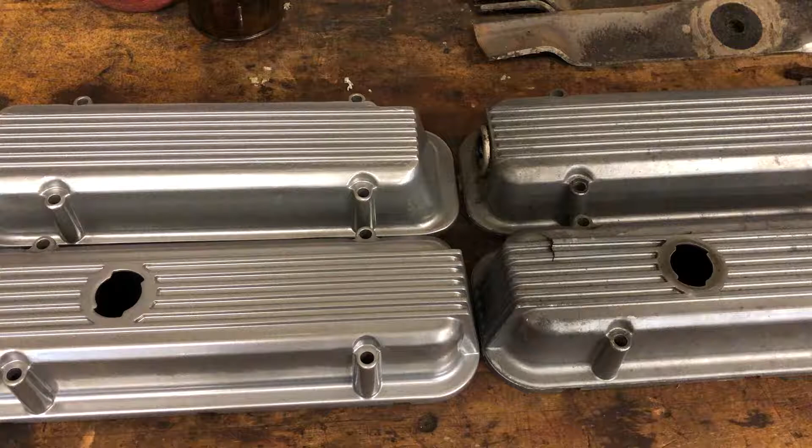Today is Sunday, December 23rd, 2018. Friday afternoon I picked up my latest set of valve covers from Final Finish in Bowling Green, Kentucky, home of the Buick GS Nationals. I say Buick GS Nationals because it's a Buick event, not Grand Nationals. It's not a turbo event, it's a Buick event, just wanted to specify that.

I got my valve cover extenders from RJC Wednesday, UPS, courtesy of Jason. Thank you, Jason. As I was telling in my previous video, this is the driver's side valve cover that got cracked, unfortunately, which is why I bought these. They were chrome, and after I got them home and started cleaning and polishing them, this side started peeling, the passenger side. So I called Final Finish, and they said bring them on, and this is the final result. I think they turned out really nice, $79.50, can't beat that. Looks a whole lot better than what I could have done with filler primer, sandpaper, and a rattle can. Plus they'll last longer.

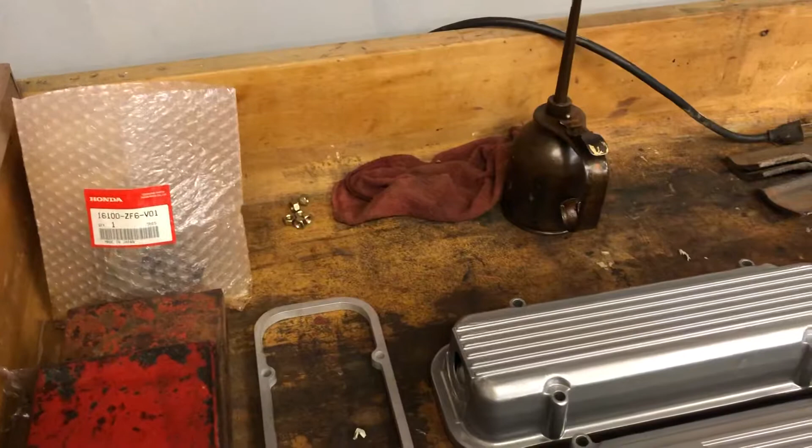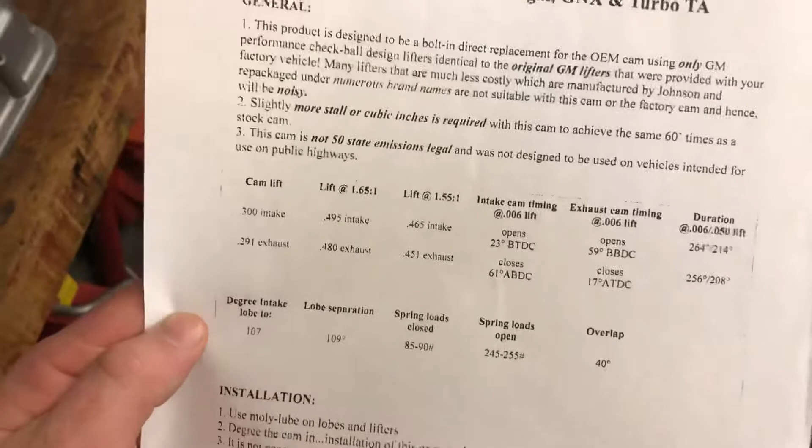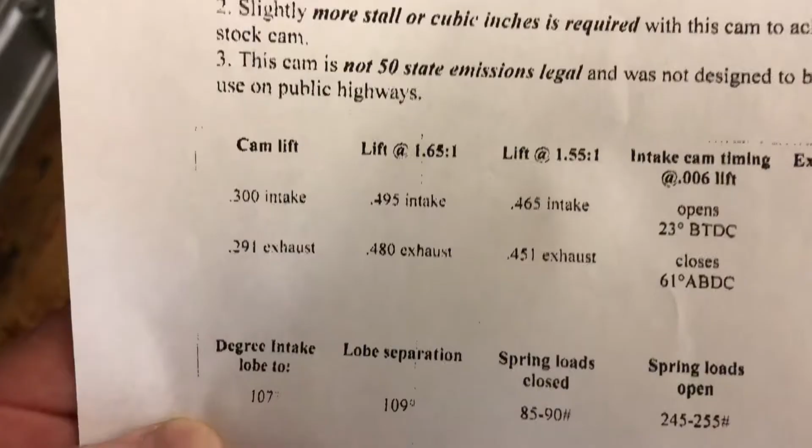I've also got my cam card here, and you know the old saying, if you don't use it, you lose it - and that in this case would be my noggin, my brain. I got my cam sheet here from ATR. Of course, they're out of business now, but they were one of the pioneers for turbo Buick, like Kenny Bell. Kenny Bell started back in the good old days with the V6 Buicks. But this is my cam card, and I have the 1.65 shaft, right here in the second column over. As you can tell, I got the 495 intake and 480 exhaust - that's my specs on my cam here. Now you know what cam is in the car. As I stated before, this motor might have 1,300 miles on it, if that.

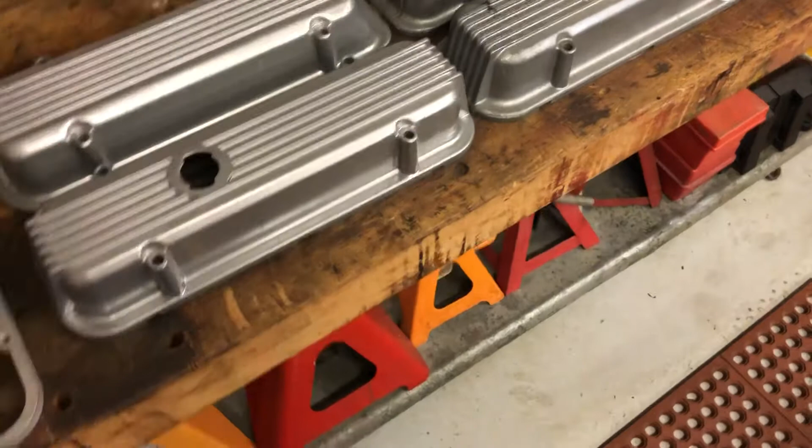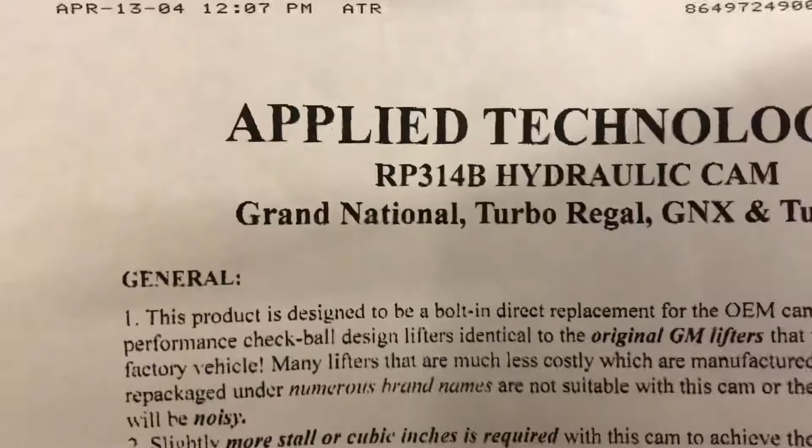This cam ATR referred to as a 214-208 cam, which in the previous video I said was a 218-218 - that goes back to the old saying, if you don't use it, you lose it. The part number is RP314B, but now you know. I've just got some papers here from when I did the motor in 2004, but as I said, it might have 1,300 miles on it, if that.

That's the old junk sitting over there, and I hope to have it back together after Christmas. It's supposed to be 70s after Christmas - of course family's coming over, it's the holiday and all, I don't want to be out here messing with the thing. But I got to get these valve cover extensions siliconed down to the head first, then slap these valve covers on, then pump out the old gas and put in some 93, and air up the tires.

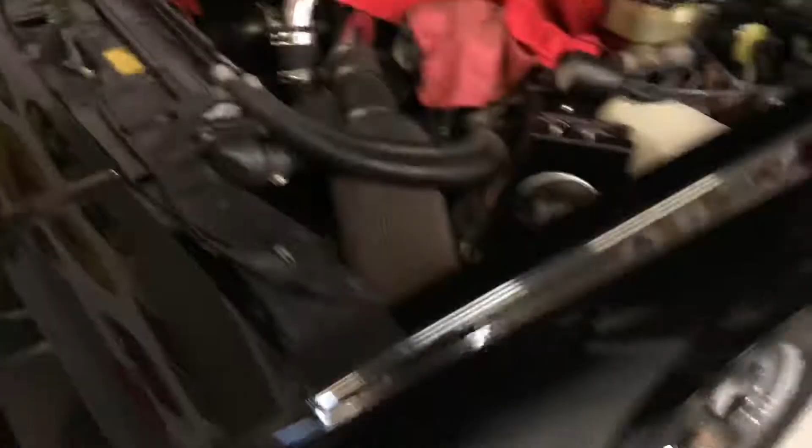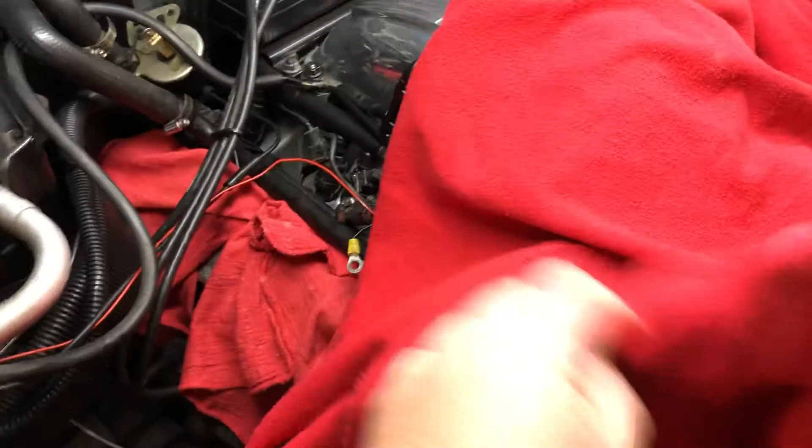Turn the light on here - I noticed something in the previous video. I don't know what caused this, I guess where this had been laying on it since April, but these plug wires faded. I can take my wet thumb and wipe them off and they clean up and match the other ones. I guess that's where this red fender cover towel laid over them. I don't know, but I've got a lot of cleaning to do under here - like I was pointing out in the other video, it's got some kind of mold or dirt, right here, you can see it.

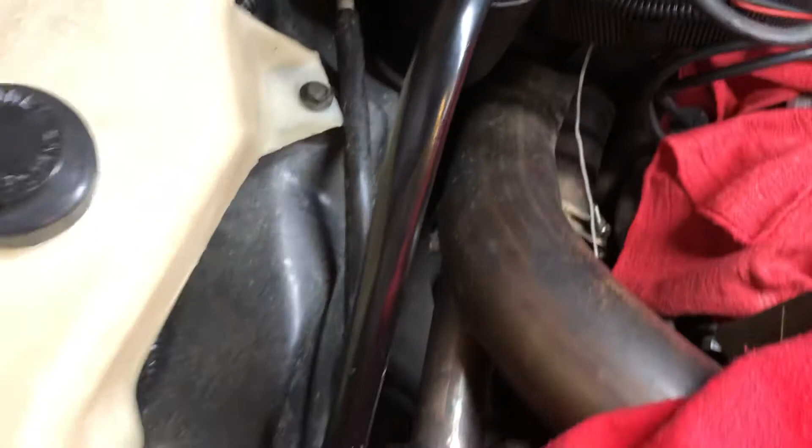It's just come about over the last 3 years and 3 months - I said 3 years and 2 months in the previous video. It was September 20th of 2015 when I parked it over here in this corner, straight in this corner, and then in April my buddy and I pushed it out and got it cockeyed here where I could get in and work on it. He came out here one day, grabbed tools, and pulled the driver's side valve cover off just to give me motivation, I guess, to get it going.

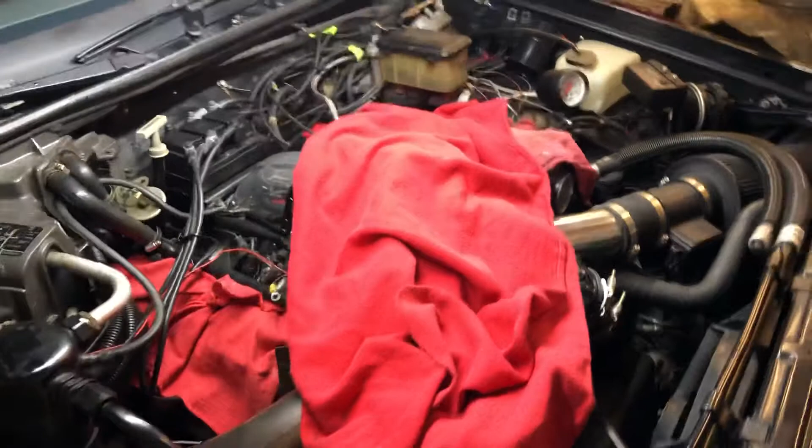Here we are now, I've got the rockers on there - thanks to him, he came back and preloaded them for me because I've never preloaded a roller rockers before. And we fired it up. It probably ran - I said 15 to 20 seconds in the other video, but it was probably more like 5 to 10, because before the motor ever fired up and ran, I built up the oil pressure, disconnected the computer and spun it over to build up the oil pressure per the gauge before it ever hit. Then plugged it back in, brought the fuel up to the rail, and fired it up, and it hit.

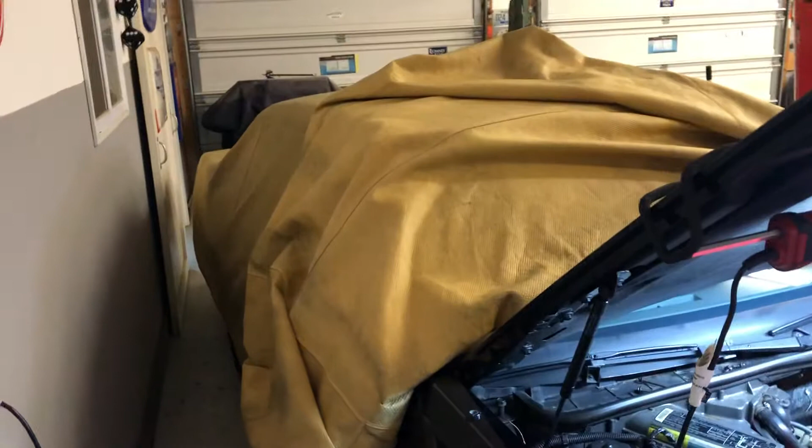So anyway, it didn't run long, but it did run for a few seconds in April, and I know it'll fire up and run fine, no noise, be quiet. My next video will be at starting, and I'll have to prop the phone up on something, wiggle it on out, and back it out the door there so you can see it move, stick the back end out the door where the exhaust can idle out after it sits and runs for a minute. Then after that I got to move it over to that other stall and do some cleaning under the hood and underneath the car, clean out this stall where it's sitting, and mop the whole shop anyway and do some cleaning.

But that's going to be it for this little video. It's kind of more of a documentary for me, just the step by step. I wished I'd had a mobile phone back then - I would have done some videos of when we pulled the motor out and so forth. But I've got some still shots, still photos - back in the day, that's all we had was still photos. But now video seems to be the thing.